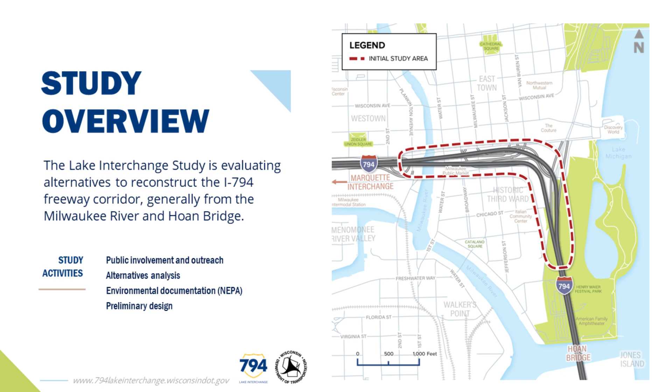So what caused us to start looking at this? We have aging infrastructure. There are 28 bridge units out there that were originally built in the mid to 70s, and they're reaching the end of their useful life. Everything's safe, everything's good. We inspect the structures routinely, but we have to start planning for what to do with these structures.

Also, as we look into it, some of the other things that are very important are the system linkages, obviously the roadway deficiencies, traffic safety, as those freeway movements move down the ramps to the local network. Obviously, community connectivity is a big issue as well. So those are some of the project needs for the Lake Interchange project.

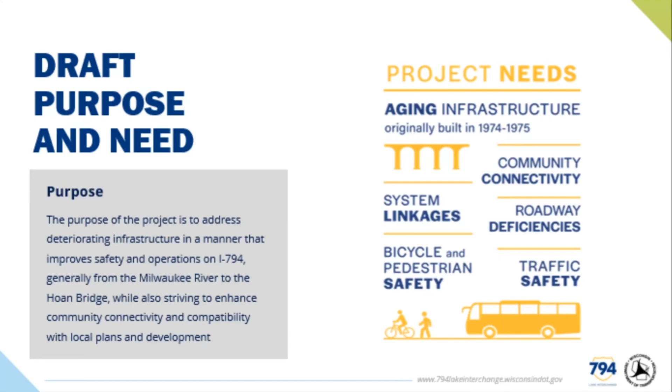Here you see in yellow or orange the 28 bridge units that have not been replaced yet. So we've rehabbed the Hoan Bridge 794 with the new bridge deck, and we've also done some rehabilitation on these units since they started. And then towards the Marquette, which is over here to the west. I should also mention, most of you are familiar with the map, but north is to the top. Obviously, the lake is to the east, and the Marquette is just off the page to the west.

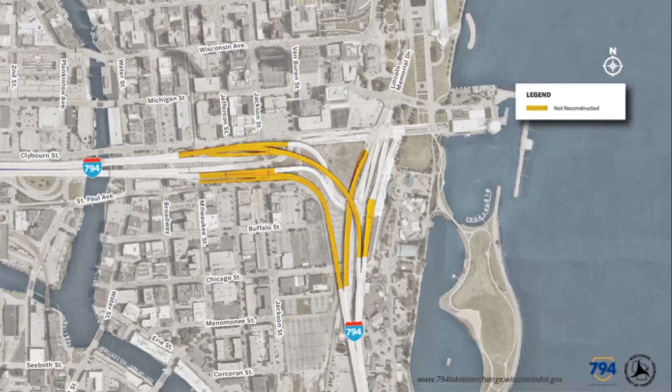Again, some of those bridge conditions were the origination of this study. We have some shiplap joints, which are shown there. They're very hard to inspect and very hard to maintain. Also, we have some bridge deck cracking and damage and scraping. Some of these pictures may look really bad, but they're still very strong. So everything is good from that standpoint.

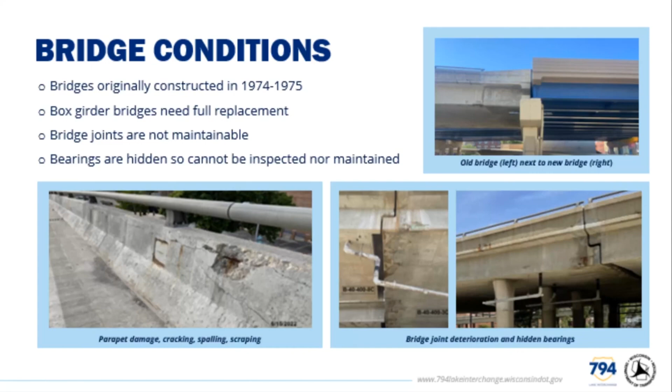We try to find these scary pictures, right? So, what are some of the other things that we look at? Obviously, the substandard curves. Many of you maybe even have seen trucks tip over on the west to southbound movement, the 35-mile-an-hour curve. We've seen that actually from one of the windows of the downtown building where we're meeting, right? So those are some of the safety things with the substandard curves.

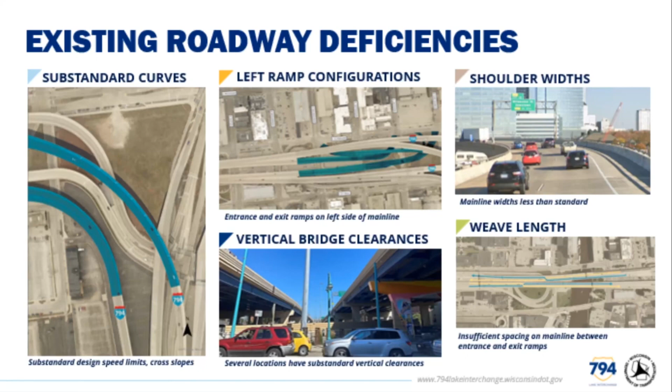The ramp configurations: typically we like to be right-hand exit and entrance, but in this case, they're left-hand entrance and exit. And there may be a reason to keep it that way too. We'll talk more about that in a little bit. But shoulder widths on the bridge, weave lengths, and then the vertical bridge clearance from the catenary lines on the Hop too at Broadway and Milwaukee as well. So vertical clearances are issues to look at.

Obviously, on the city streets, we have 5-legged intersections. That makes it complicated for several different things. It's just not a typical intersection. It has a ramp coming right into a normal 4-way type of intersection. So there's a lot more confusion there. It makes it harder for bikes and peds and those other users of the facility. And also we have a lot of sidewalk discontinuity in this area. So those are some of the other things that we want to look at as well.

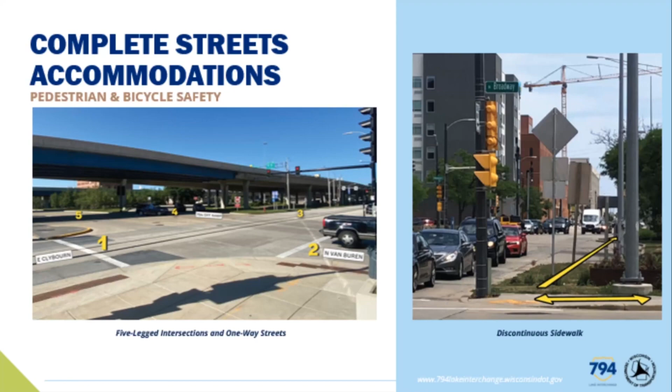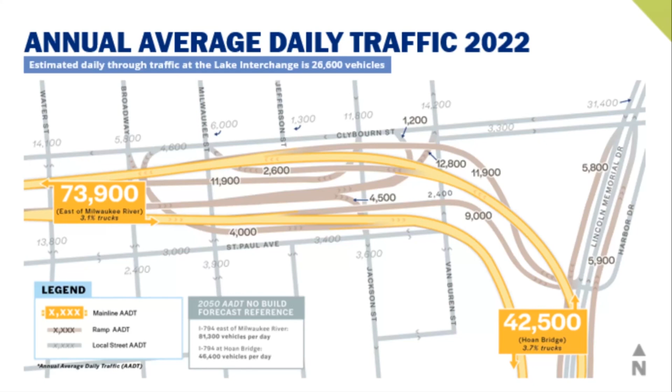Thanks, Joe. My name is Mike Hammond with HNTB, a consultant working on behalf of the Department of Transportation on this project, really focusing on public outreach. So I'm going to talk a little bit about our engagement approach and process. It's grounded in an approach of listening first. What that means is we wanted to meet with stakeholders and the public really early in the study to understand needs and priorities before we got too far along and started to develop actual design concepts.

To that end, we've had over 2,000 comments on the project from the public thus far, either through our website or through our in-person engagement events. We've also held several stakeholder one-on-one meetings with entities like yourselves who are engaged in this corridor on a day-to-day basis, to understand their needs and priorities, whether it's for their employees, their group, their association, what have you.

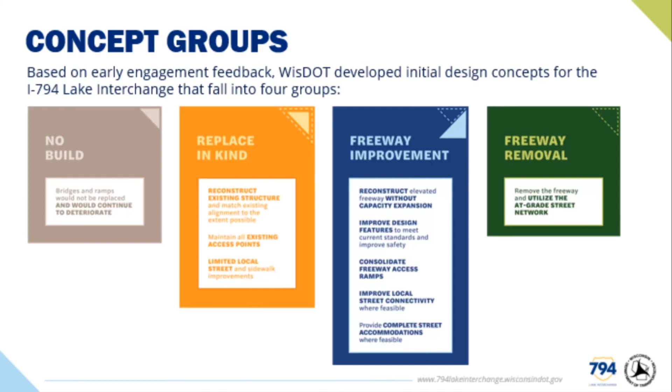So this is that baseline. This is the replace in kind. This is what those 28 structures look like in one of our engineering drawings, kind of spruced up. What I think is most interesting here is, I know this is a drawing, but that's how much infrastructure is remnant out there that needs to be replaced.

It's 28 bridges, and it's a pretty big footprint. There's a lot of infrastructure that needs to be replaced that hasn't been as part of the Marquette or the Hoan Bridge, and sometimes people forget that. These are untouched bridges from the mid-70s. But if we're going to reconstruct all this, there's a lot of opportunity, and that's what the department is committed to looking at.

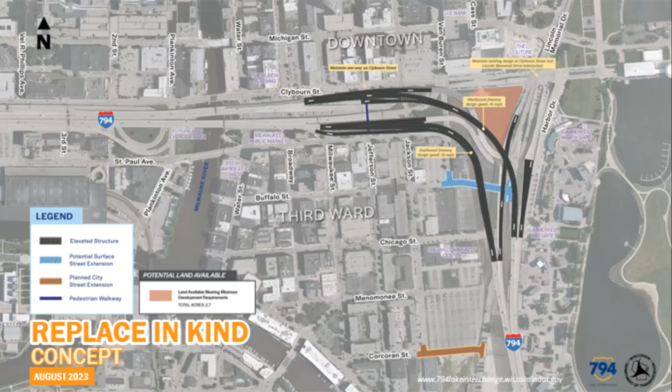Joe mentioned that there's 8 access points today. I didn't point it out on the previous slide, but with the replace in kind, we would maintain all 8 access points. With all the improvement concepts, we're consolidating those 8 access points to 4: 2 entering and exiting from the west, and 2 entering and exiting from the south.

In this concept, I want to point out that the freeway is wider. You can particularly see that on the west, if you look even further to the west of the river.

Excuse me, I think it's coming back early from a Labor Day weekend here. These breakfast meetings, you guys are committed.

So you can see that the existing infrastructure today deviates west of the river. The footprint kind of sets itself apart, and that creates this void in the middle. So with this freeway improvement concept, we're trying not to go further to the west. The advantage there is that we can save more infrastructure. The trade-off is that we have a limited ability to consolidate the footprint.

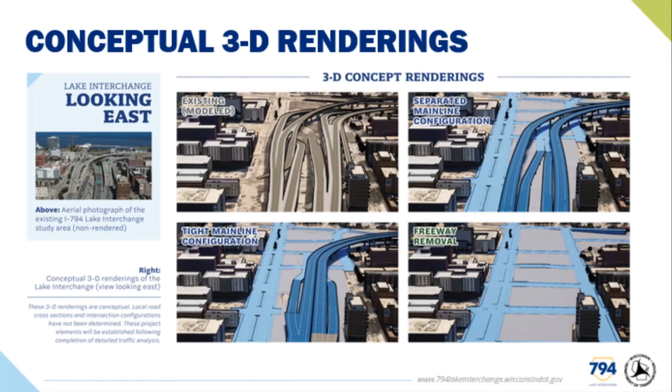Thanks, Mike. So our next steps, obviously, we're in the process of going through the 2 PIMs that we had, and we had 800 people there. We're going through those. We also have 1,000 comments to go through. So we're looking through those now, taking that feedback. Obviously, we're going to continuously take comments. By all means, go to our website. You can put in comments.

Till when's the public comment period for the PIMs? Ended on Friday. Okay, but we're still taking public comments, and it's not going to be the last time that we go to the public, right? We're going to have several more meetings that will be announced. They're to be determined yet, but I think roughly the next time will be the first quarter of next year, because our team has a lot of work to do to take all those comments back and then to start the evaluation process that Mike talked about.

So next steps, review those comments. Then we're going to identify concepts to advance as alternatives. I'll say that I do not see any of these buckets being removed as we move forward to the next PIM. Advanced traffic analysis, it takes a lot to look at the traffic modeling for these different concepts or bucket groups, as Mike talked about. So that's what's taking this time. We need that time to really evaluate. And then we're going to hold a second public meeting, as I mentioned, in early 2024. So with that, we'll turn our attention to some questions.

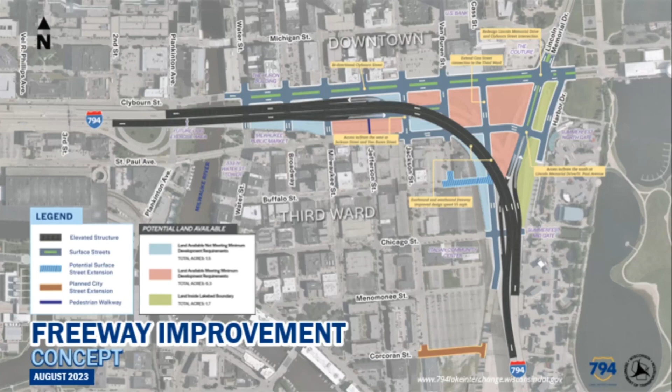If we bring them in more at a 90 and make them purposefully turn, that was one way that we can try to control that intersection a little bit more. And then if we can go from a five-legged intersection to a four-legged intersection, what that can do is just make it so much more predictable and usable from a pedestrian and a bicycle standpoint.

As a big fan of freeway removal, have you thought about the way that a transportation hub and increased parking could allow better public transportation access throughout the city? This might allow us to absorb downtown traffic and make it easier for people to move within the city rather than going right through it.

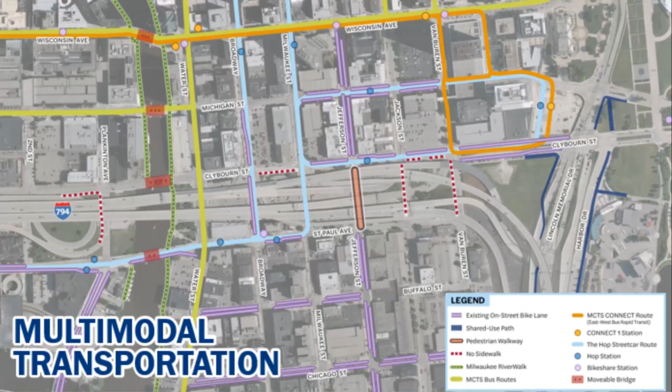Well, one of the things, we're looking at multiple different users for here, and as far as a hub goes from a traffic facility, the department has park and rides, those kind of things that we partner with. But other than that, we're not going to impact the Hop. We're going to impact the Hop more than likely with just the construction process. But the purpose of that would be to maintain the Hop and impact it as little as possible. Obviously, you have BRT and other different users from the county services, their bus systems. All those are going to stay intact.

I know there are several parking garages. And I will say this too about underneath the freeway. All that land is currently in county highway parcels right now. So that's how it's going to impact the county from that perspective. But the parking itself may not be the highest and best use of that land, and we're seeing that. But obviously, there are many users of that, and that would be something that has to be evaluated as we move forward with those freeway removal concepts.

What stays and what goes in those concepts still has to be looked at in the design. So we'll get further in there. But as far as having a hub, we'll be partnering with the city, and I would look to the city and the county to look at other means and methods for BRT enhancement or the Hop enhancement or other things that are out there. Hopefully I answered your question. Yes, sir. Morning, thank you.

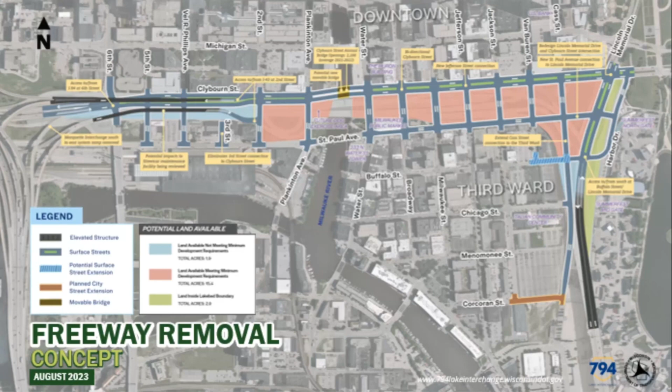Two questions there I heard. As far as the structure, we looked at it, just I say briefly; we'd want to look at it more thoroughly, I think. As far as a Clybourn structure, an actual physical structure over the river, the grades that we would have to do are pretty limiting. It would actually impact Water Street. It would impact Broadway. So it would be sort of counterintuitive to get up to it. And if one of our goals is to help connectivity, we'd actually be going sort of backwards on that particular alternative if we try to go over with the physical bridge on Clybourn. But that's not a final answer, right? Let's look at it a little bit further.

As far as the river cruises, that's another user of the facility or the area that we'll need to consider. But there's been no talk that I know of at this point of saying, oh, we're going to limit this. That's going to be more of a partnership with the city at that point. So we haven't considered anything like that. That kind of ordinance would have to come from the municipality.

Hi, two quick questions, I hope quick. One a little more global and one local. We took down the Park East Freeway 20 plus years ago, and at that time there was a lot of that going on nationally, the Embarcadero, other stuff. Wondering where are things now as we look around the country? Is there an effort to bring things down to grade more? Is there more removal of this? And then with the experience of the Park East and how that informed and influenced us, how much relevance does that have to what you're doing now and what we're thinking about as a community?